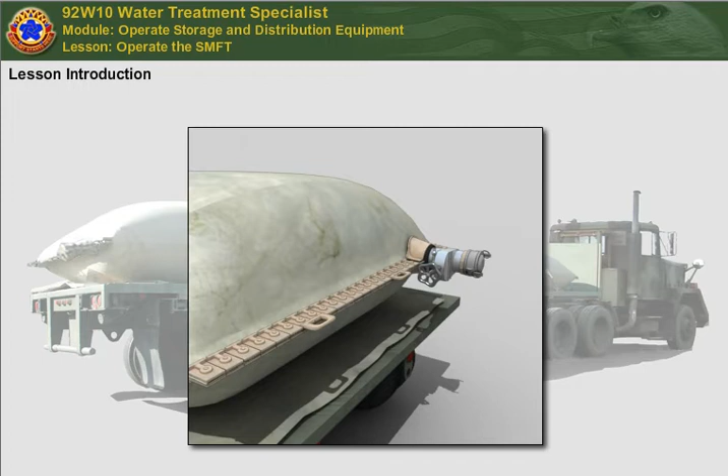Supply lines in today's theater of operations stretch for hundreds of miles. The semi-trailer mounted fabric tank, or SMFT, is a key asset in transporting bulk, potable water long distance. As a water treatment specialist, you must understand how to set up and operate the SMFT correctly.

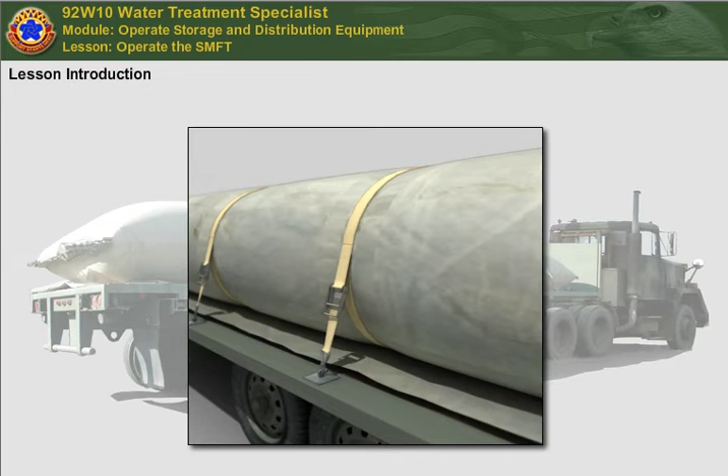In this lesson, you will learn how to operate the SMFT. The key training points include uncrating, installing, filling, emptying, folding, and cleaning the SMFT.

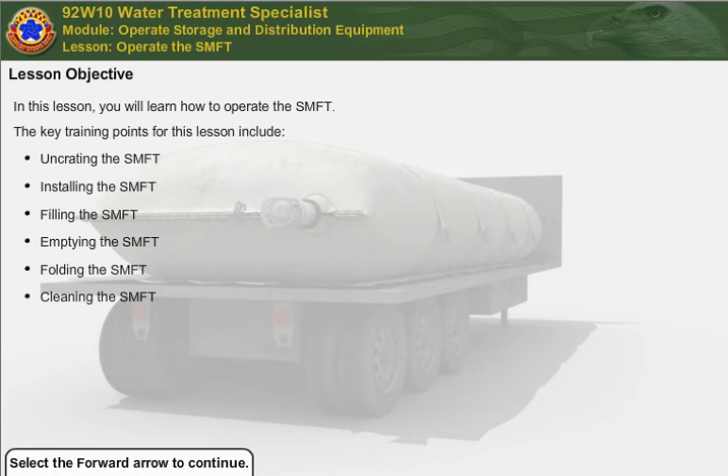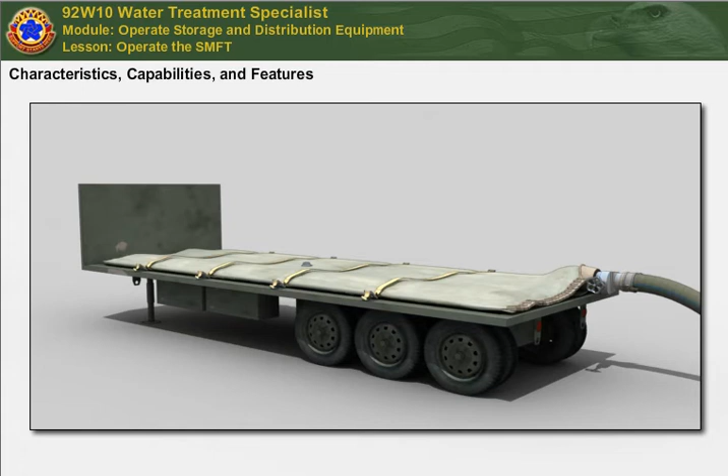The 5,000-gallon tank can only be installed on the flatbed of an M872 semi-trailer. The 3,000-gallon tank can be installed on the flatbed of an M872, M871, or M127 semi-trailer. This lesson will focus on the 5,000-gallon SMFT tank.

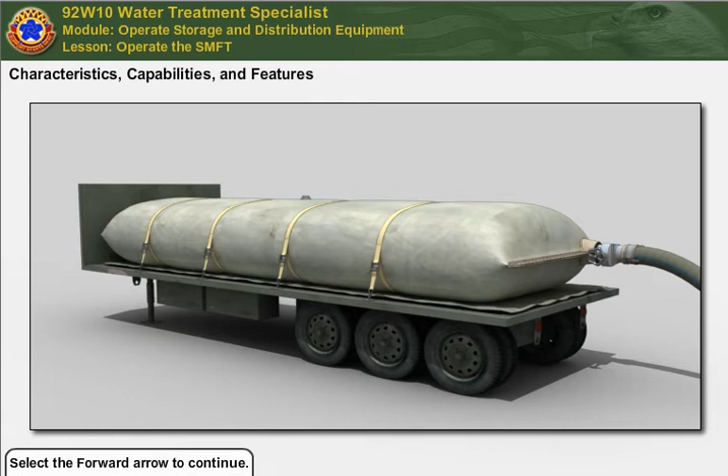To operate the SMFT, you must understand how to handle the water tank.

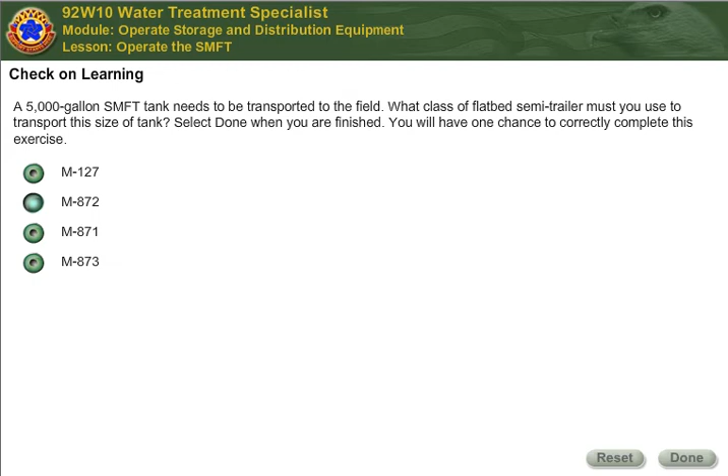You must understand the SMFT's components to use the tank properly. The tank is used for the storage and transport of potable water. The assembled unit consists of the collapsible tank, fittings, tie-down straps, and emergency repair items to secure the tank safely on the M872 semi-trailer. Select each item to learn more.

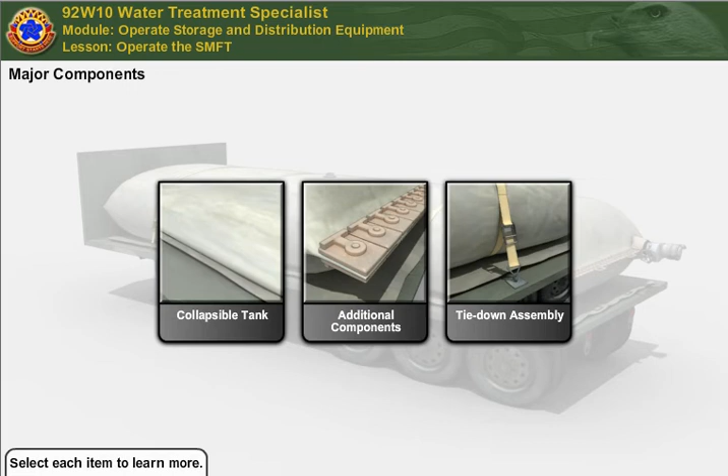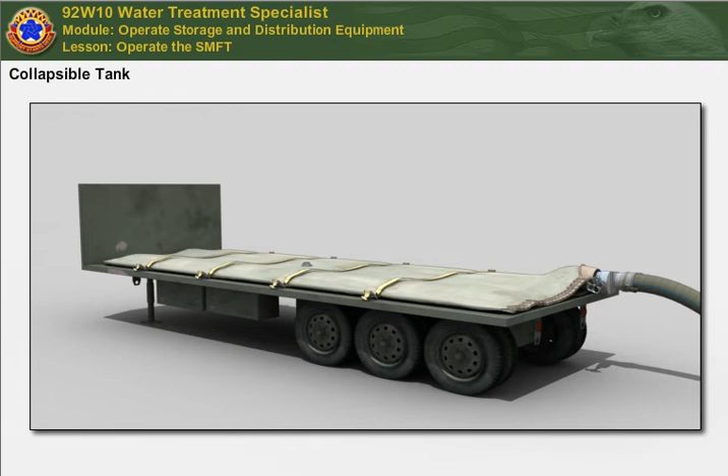The tank is constructed of a chlorobutyl liner, a rubber-coated multi-ply carcass, and an exterior weather and abrasion-resistant tread stock. When laid flat, the tank is 39 feet long by 7 feet 4 inches wide by 4 inches high. When filled, it assumes a pillow-like shape approximately 38 feet long by 5 feet 2 inches wide by 4 feet

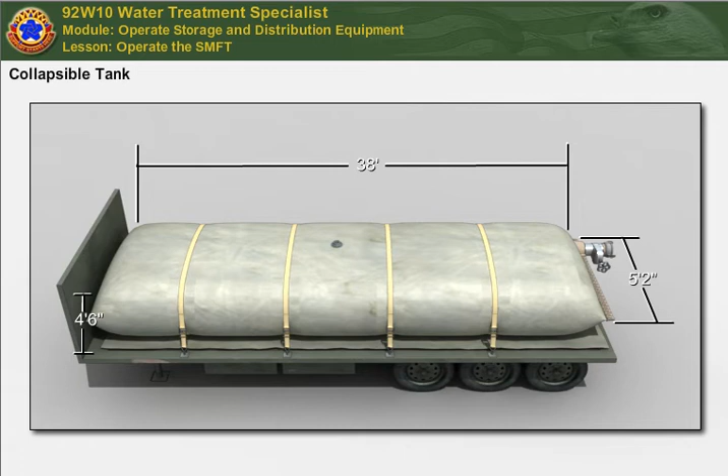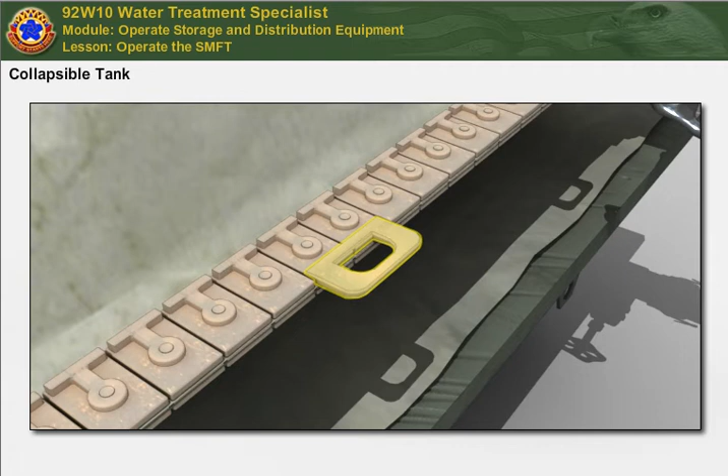6 inches high. Access to the tank interior is provided through the use of end clamps, which may be removed by qualified personnel. Handles are provided to facilitate positioning of the tank while empty. When not in use, the tank may be folded or rolled and stored in the sling and shipping container.

Operators must be familiar with the location and function of all components before operating the system. Select each item to learn more.

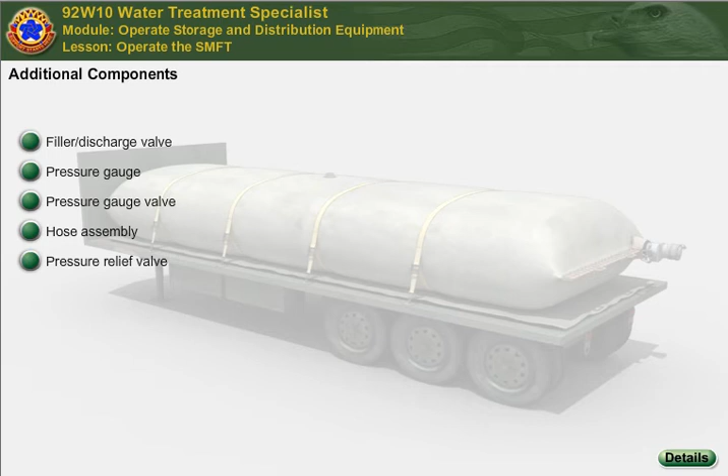The filler or discharge valve is a 4-inch gate valve, which, together with the hose assembly, provides the connection necessary to both fill and empty the tank.

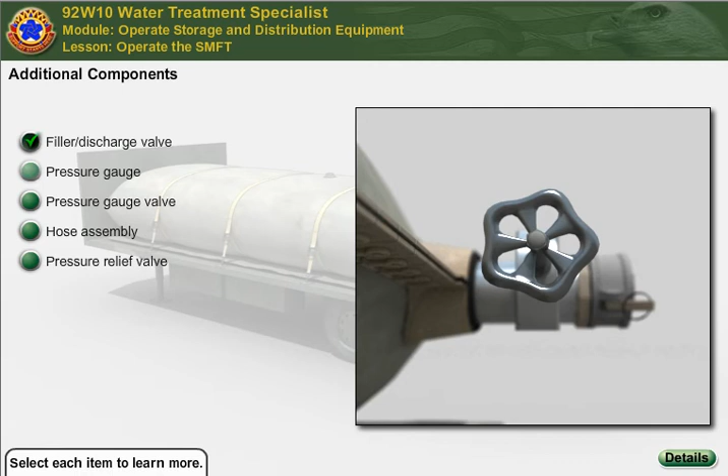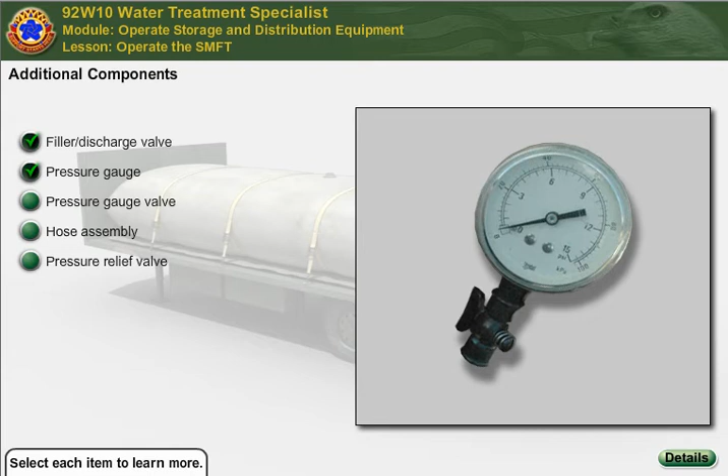A 0 to 15 psi pressure gauge is supplied to monitor the pressure of the filled tank. Operating pressure is 4 to 6 psi. The pressure gauge is controlled by a 1/4 NPT valve. The valve is to be closed when the pressure gauge is removed.

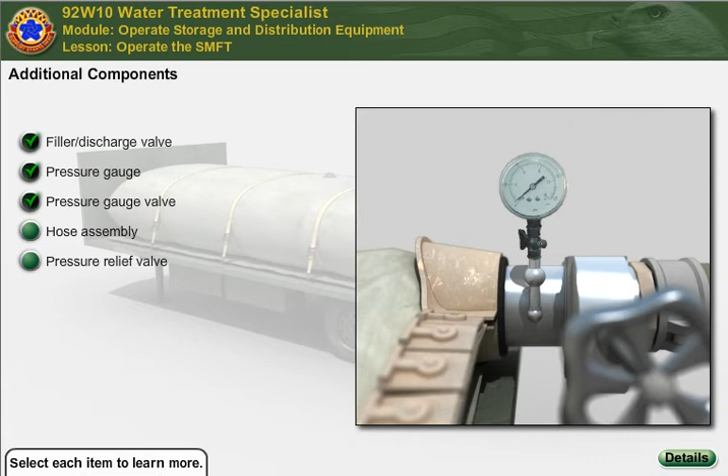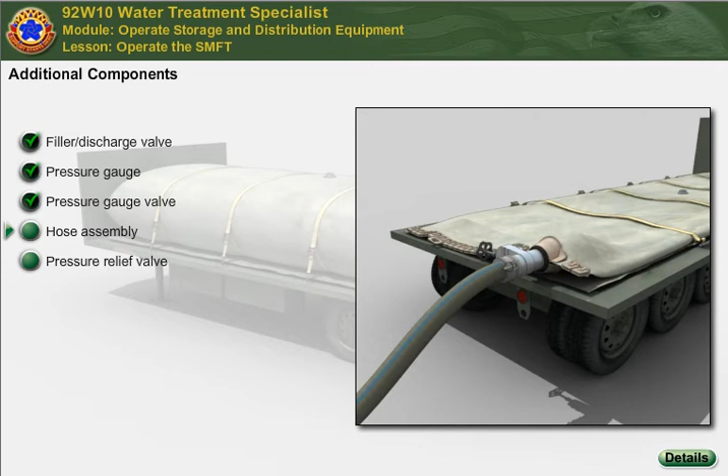The hose assembly consists of two 10-foot-long by 4-inch diameter potable water hose, FDA approved, supplied with quick disconnect fittings. The pressure relief valve is manually operated to relieve trapped air. It is open and closed with finger pressure.

The tie-down kit consists of 4 belts, 8 ratchet take-up mechanisms, and trailer attachments specifically designed to minimize tank movement during transport.

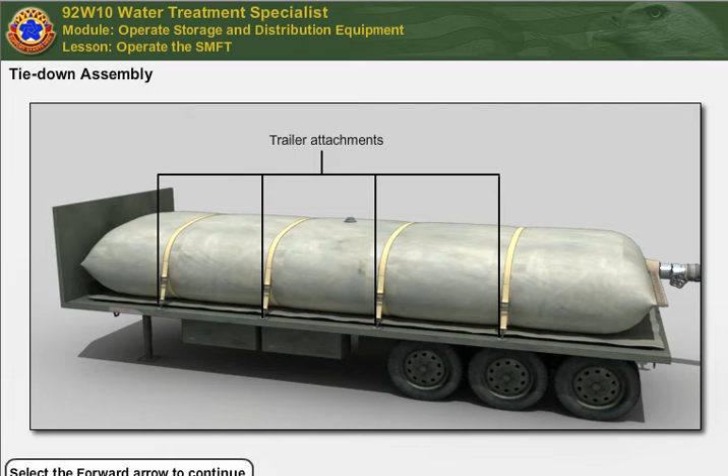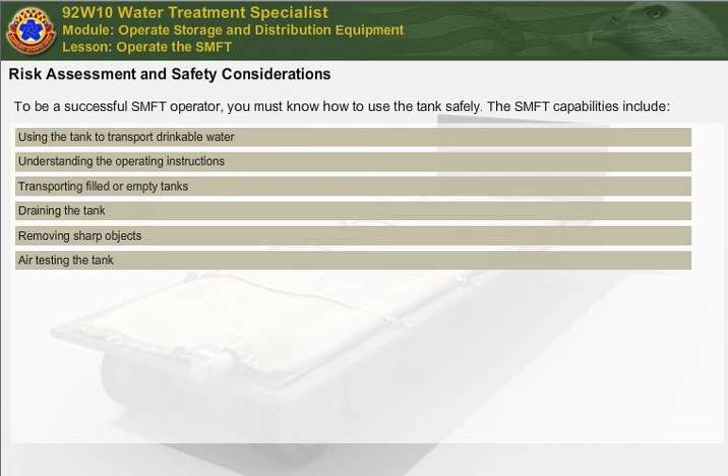To operate the SMFT, you must understand how to use the tank. Select each item to learn more.

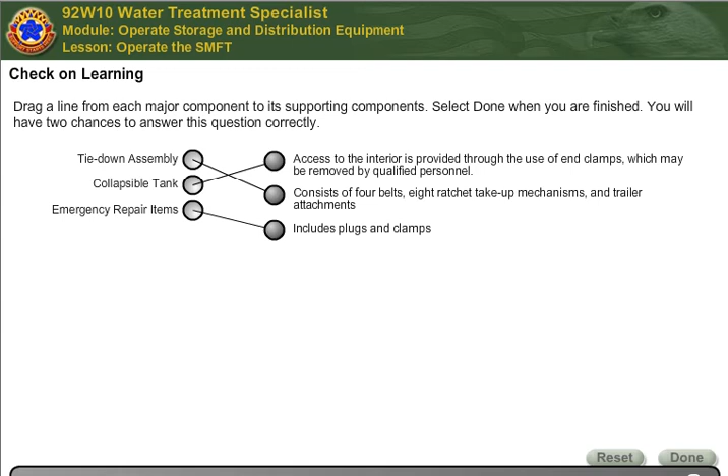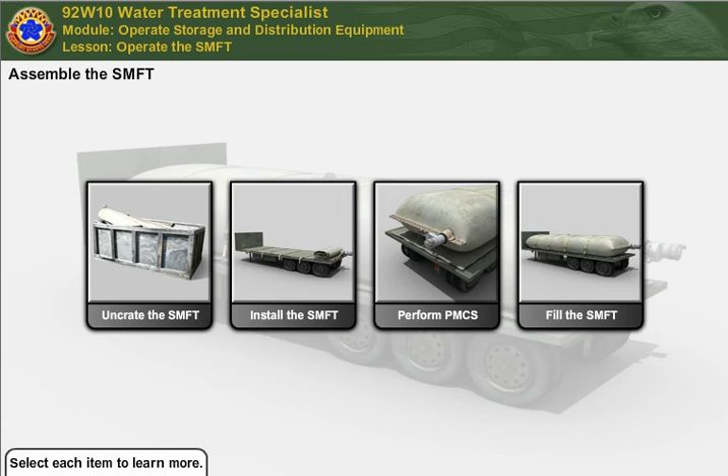There are several tasks you must perform to assemble the SMFT. Select each item to learn more. When the tank is received, you must unload it as close to its point of installation as possible.

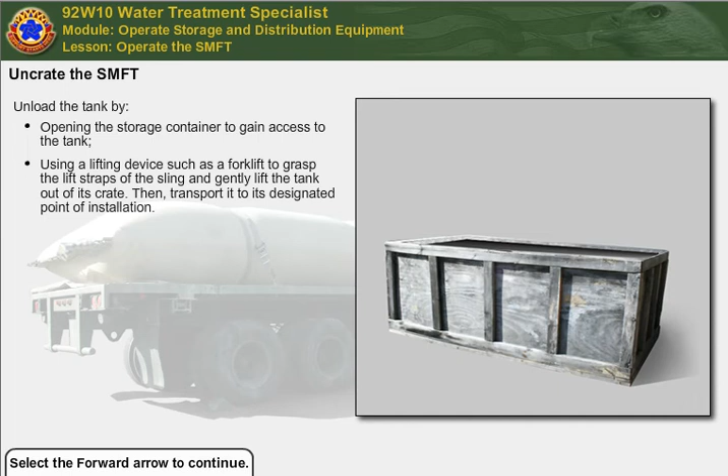To install the 5,000-gallon SMFT tank on the flatbed of an M872 semi-trailer, you must perform several tasks. Select each item to learn more.

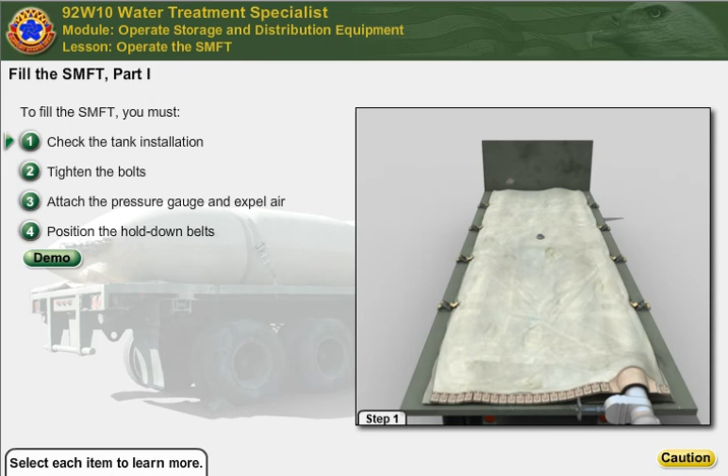Check to see that the tank is properly installed. The trailer should be level to prevent the tank from rolling. Tighten all bolts in the fitting using 70 foot-pounds torque, 5 foot-pounds on the half-inch diameter bolts in the end clamps. Attach the pressure gauge to the filler or discharge valve and open the pressure gauge valve.

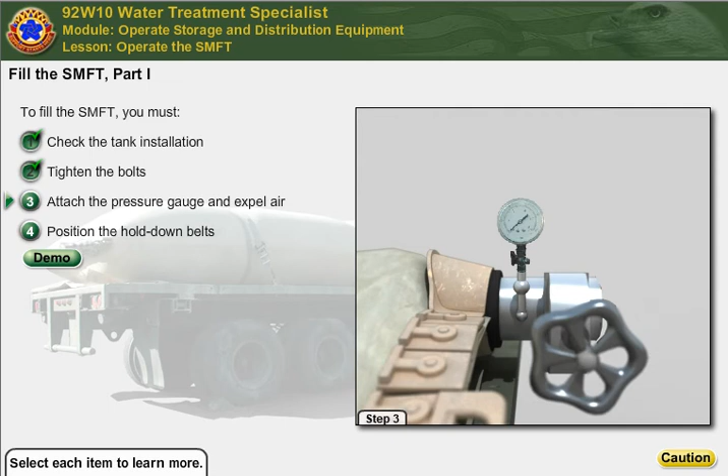Expel all air from the tank so that the tank lies flat on the bed, and then close the 4-inch tank inlet valve. The free ends of the hold-down belts should now be brought over the top of the tank and down the other side through the ratchet take-up mechanism attached to the truck bed.

Slide the ends of the belt 2 feet through the slot in the ratchet assembly. Fold the end back on the belt and manually hold it until one turn has been taken on the roll-up spool.

To continue to fill the SMFT, you must perform several steps. Select each item to learn more.

Attach 1 or 2 4-inch by 10-foot hoses to reach the water source. Purge the air filler hose by opening the valve on the hose nearest the pump until water comes out. Then close the valve.

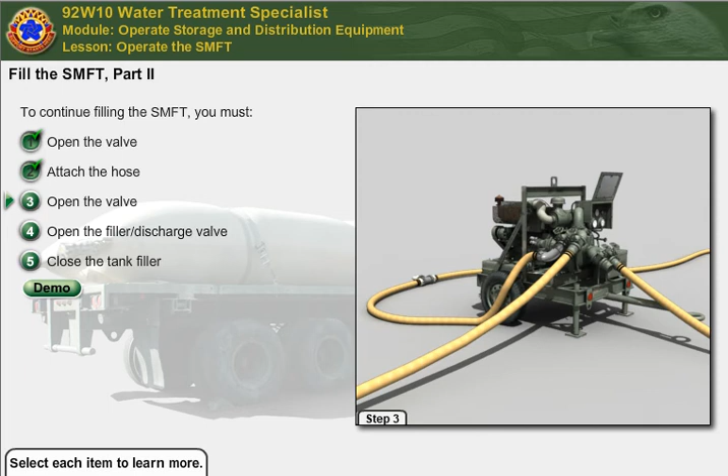Attach the hose to the tank filler/discharge valve. Open the valve at the water source to allow water to be pumped toward the tank. Open the filler or discharge valve on the tank.

No pressure will show on the pressure gauge until the tank is approximately 2 feet high. Periodically close the tank filler and discharge valve to obtain a precise tank pressure reading. Open the valve after the reading has been taken and resume filling.

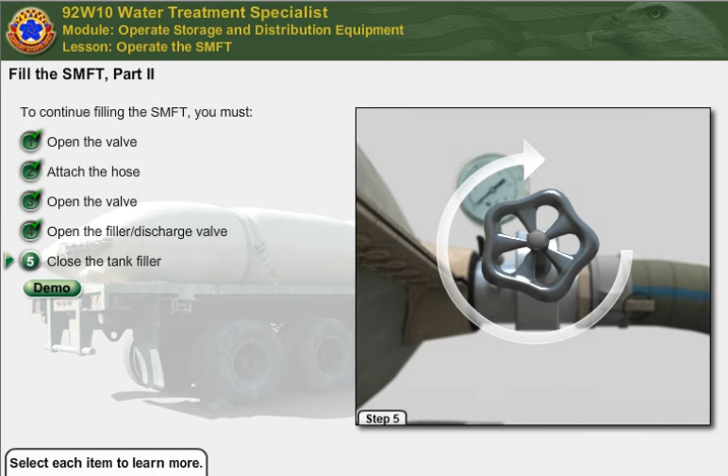To finish filling the SMFT, you must perform several additional steps. Select each item to learn more.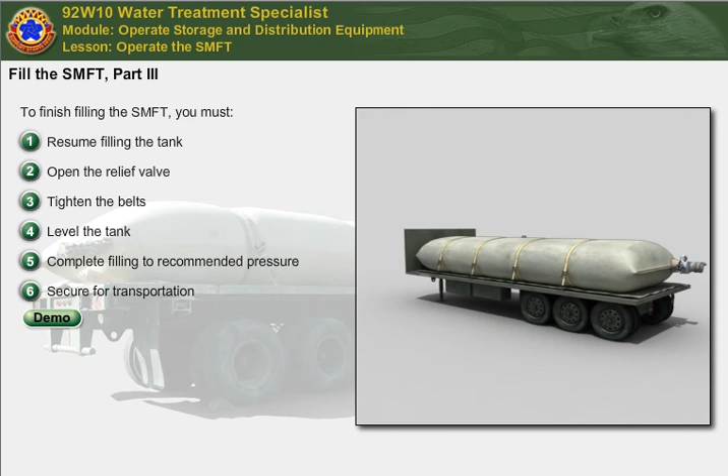After taking the pressure reading, open the 4-inch filler or discharge valve on the tank and resume filling to 2 to 3 psig. Open the relief valve on the top of the tank until water flows from the valve.

The belts should now be tightened with a portable ratchet wrench. Tighten belts to the maximum possible with one hand on the ratchet handle. The second hand should be used to steady the ratchet assembly. Ensure that the ratchet handle has dropped securely into the locking mechanism.

When all ratchet assemblies have been tightened uniformly, the pressure in the tank will be increased approximately 1/2 psi. If the tank ends are not level with the floor of the trailer, the tank may be leveled by releasing the ratchet on one side of the tank and then taking up the slack by tightening the opposite ratchet.

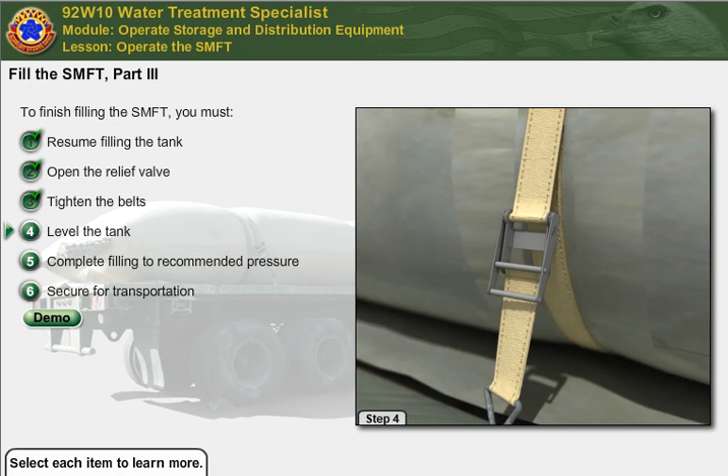After filling the tank to correct pressure, shut off the filling line valve first. It is recommended that tanks be filled to a final minimum pressure of 4 psi and maximum pressure of 6 psi. Then shut off the tank filler or discharge valve and disconnect the filling line.

Some loss of water between the valves will be experienced at this point. Material is under pressure between the valves. For example, low pressure if the filling line valve is shut off first as directed above, and high pressure if the tank valve is shut off first.

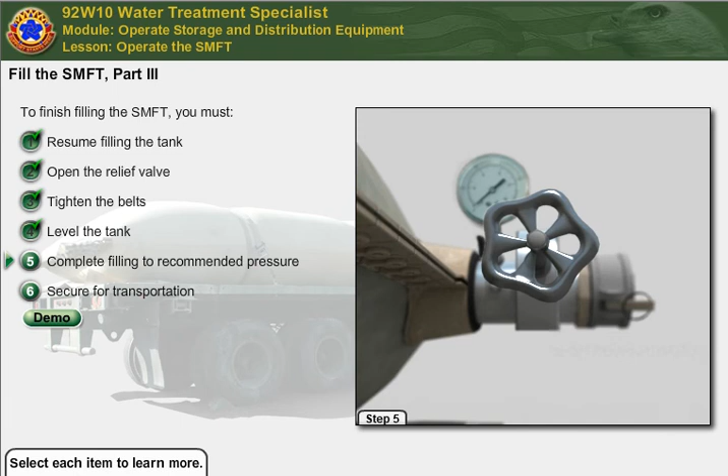The tank is now properly secure for transportation. Regular periodic check for tight belts is also recommended. They should be tightened at least every 2 hours. Transport the tank only when completely full or empty.

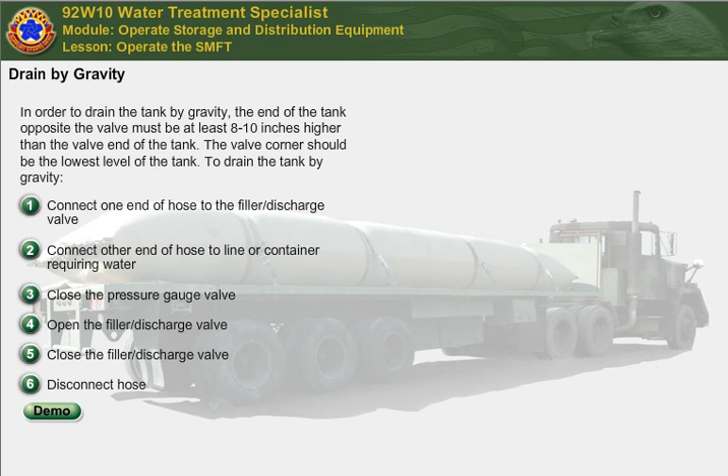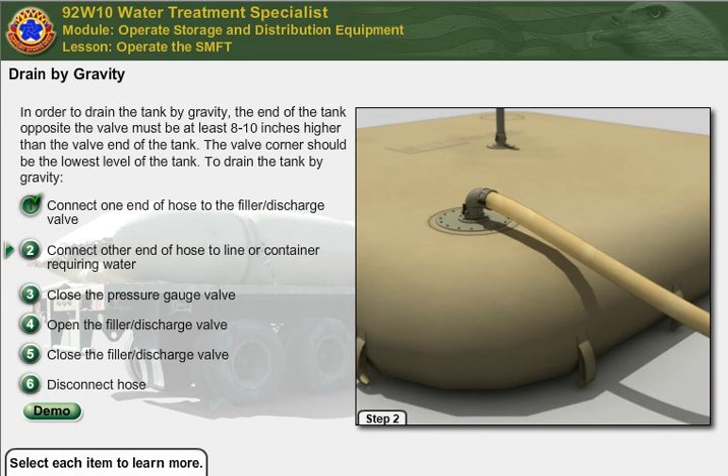Connect one end of the 4-inch diameter hose assembly to the tank filler or discharge valve. Connect the other end of the hose to the line or container requiring the potable water.

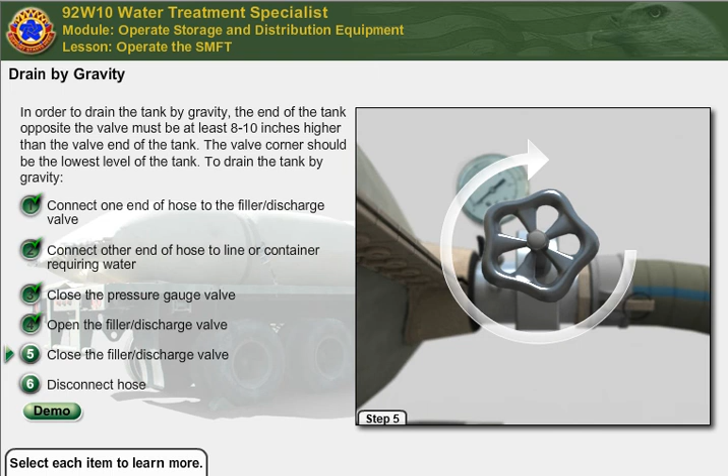Close the tank pressure gauge valve. Open the filler or discharge valve on the tank to start the flow. After operation is complete, close the filler or discharge valve on the end of the tank.

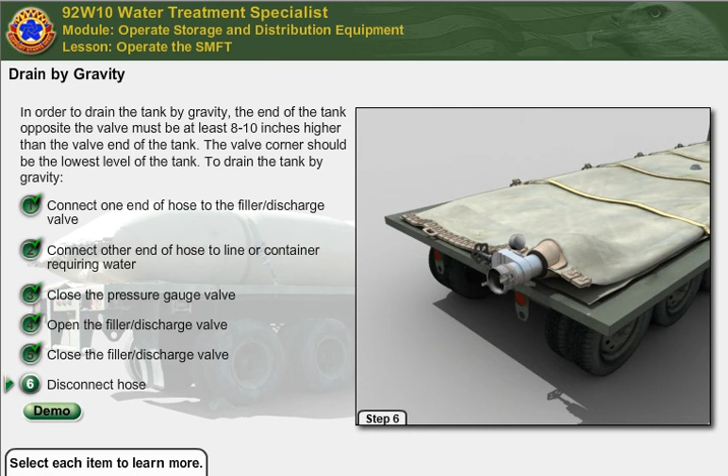Disconnect the 4-inch diameter hose assembly from the line or container, and then disconnect the hose from the tank filler or discharge valve.

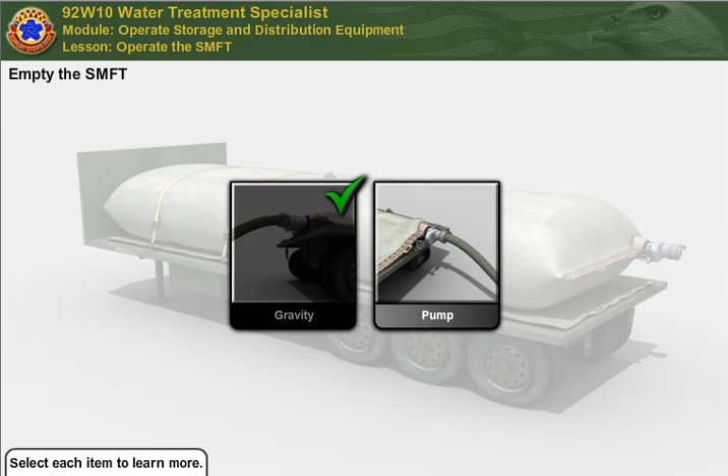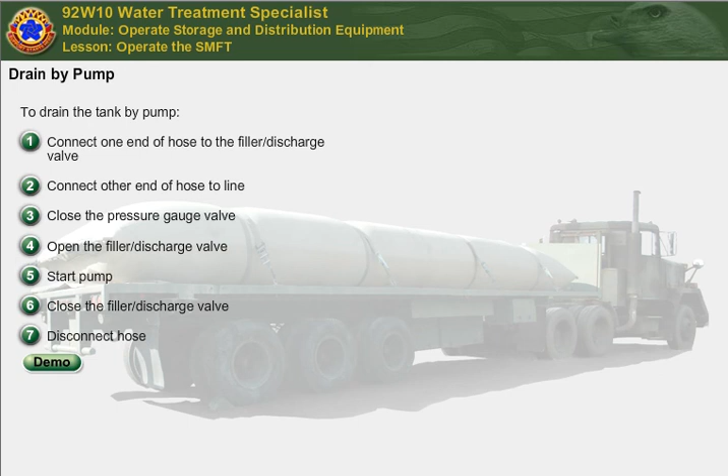Perform these steps to drain the tank by pump. Select each item to learn more.

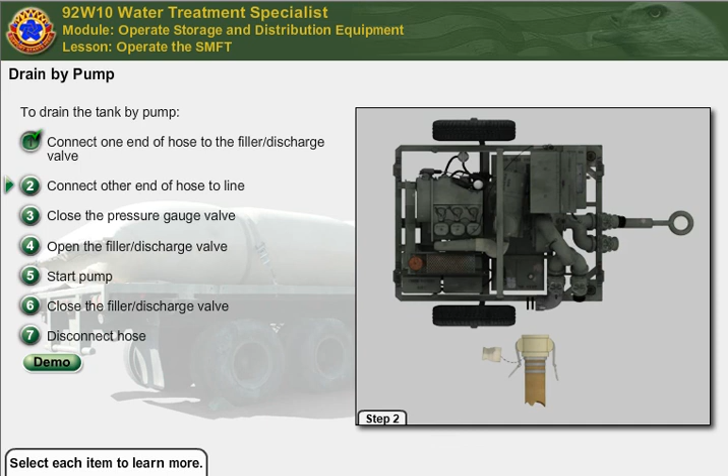Connect one end of the 4-inch diameter hose assembly to the tank filler or discharge valve. Connect other end of hose to the line or directly to the pump.

Close the tank pressure gauge valve. Open the filler or discharge valve on the tank to start the flow. Start the pump. Draining rate is not a factor in tank operations.

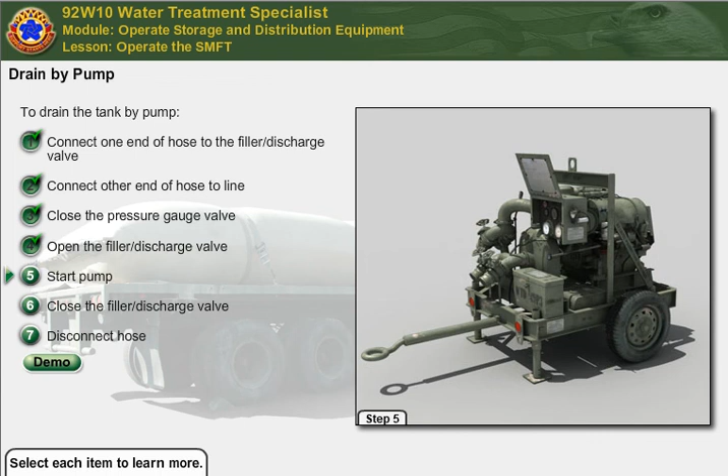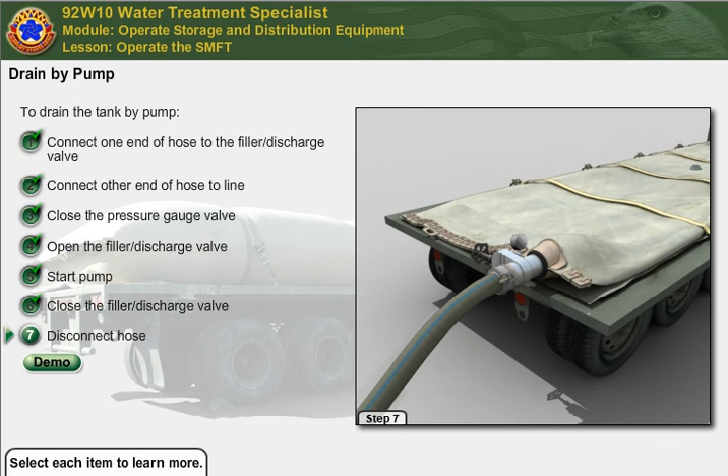After operation is complete, close the filler or discharge valve on the end of the tank and the valve on the pump. Disconnect the 4-inch diameter hose assembly from the line, container, or pump, and then disconnect the hose from the tank filler or discharge valve.

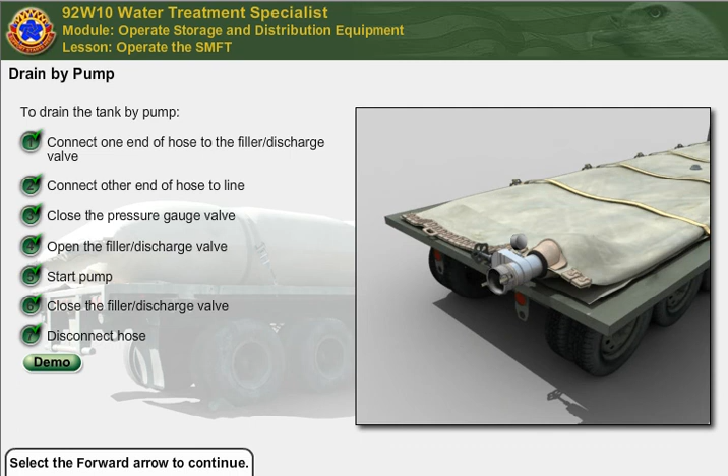Cleaning the SMFT involves several tasks. Select each item to learn more.

With the tank empty and flat on the trailer, partially fill it with 100 to 300 gallons of clean disinfectant and water solution. The solution consists of 1/2 gallon commercial bleach mixed into 250 gallons of fresh water.

Then surge the truck with abrupt starts and stops. The resultant surge will clean or rinse the collapsed tank without exposing its interior to contaminants or foreign objects.

When the cleaning solution is drawn off, close the tank valve immediately to prevent any additional contaminants from entering. Dispose of cleaning solution in accordance with unit standard operating procedures.

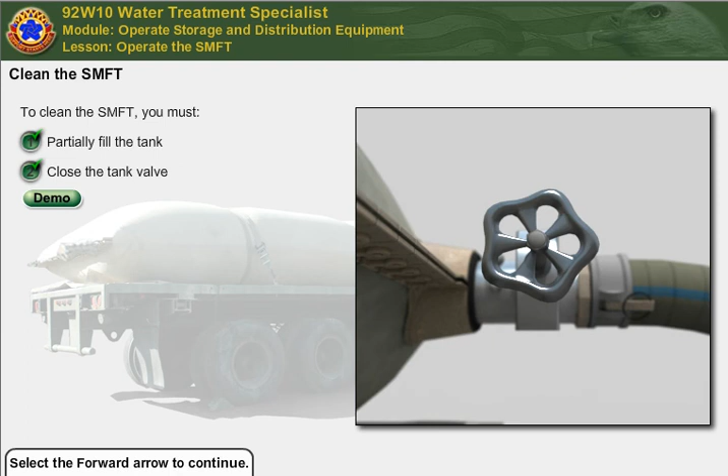There are several tasks you must perform to disassemble the SMFT. Select each item to learn more.